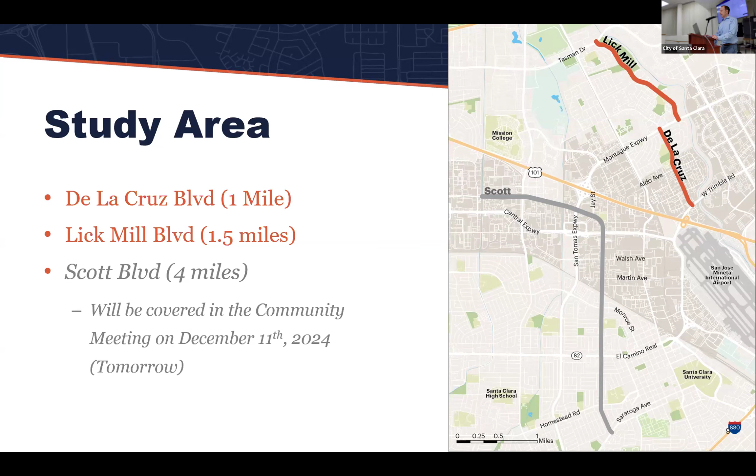The project came about originally from initial planning done by the bike plan in 2018, the city's adopted bike plan. The goal of the project is to implement the recommendations from the bike plan. For De La Cruz, that means class 2 bike lanes, striped bike lanes on the roadway north of Montague Park, from Montague to Montague Park.

Then class 4 separated bikeways, where the bike lanes are separated by some sort of vertical item, a bollard or a post, south of the park. For Lick Mill, the idea is to have a class 4 separated bikeway extending between Tasman and Montague, again from the bike plan.

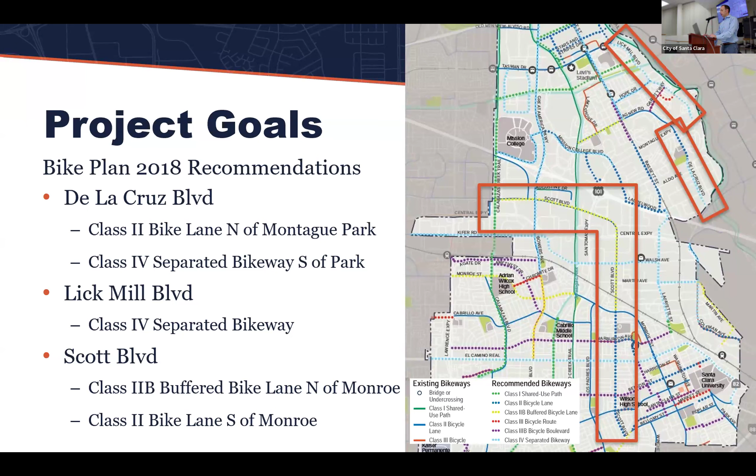For Scott, it's class 2B, meaning there's a striped buffer area between the bike lane and the travel lane north of Monroe, and then class 2 bike lanes south of Monroe to the southern terminus, which is pretty close to the city boundary.

This project has about four phases, and we're currently in the second phase. The initial effort was to collect data and develop initial alternatives. We had a community meeting last month where we presented some of those. We are evaluating the alternatives now and looking for community input to assist with that. Once we get the community input and technical analysis, it will be up to the city council to select a preferred alternative.

That process will include going to the Bicycle and Pedestrian Advisory Committee next month and to the city council in February. Once the city has selected a preferred alternative, then comes environmental clearance and final design. We want to emphasize that no alternatives have been selected or chosen at this point in time. We've identified some alternatives and are looking for community input to decide next steps and inform the council's decision.

The overall project schedule is a quick one because of the terms of the grant. We had an initial BPAC meeting back in summer, a second BPAC meeting in August, and a third BPAC meeting about a month and a half ago. Those were to review the initial alternatives and advance them. Since then, we've conducted data collection and continued developing the alternatives, and had that first round of outreach.

We've done some evaluation work, which we'll present here tonight. We're preparing to go to BPAC again next month, and then the city council the month after. The goal is that by February a preferred alternative is selected and design commences.

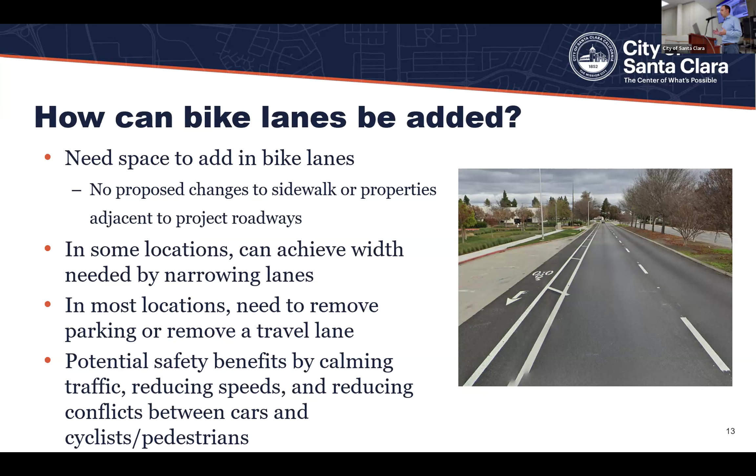Because the project budget is limited to what's in the earmark, the focus is really on striping improvements and bollard and post improvements. There won't be opportunities for a lot of concrete work to add protected intersections or modify signals, things like that. We're focused on what we can do within the available budget to add these facilities.

One of the key aspects to inform the selection of the preferred alternative is to evaluate the effect of the different concepts we've developed so far. We have several evaluation tools implemented and have information to share with you tonight to reflect that evaluation. One is collision analysis.

We've looked at where collisions have occurred in the past on these roadways, and that really informs where some of the safety challenges exist and can be addressed by this project.

Second is to look at parking, particularly in locations where parking may be removed in order to fit in the bike lanes. We've looked at where parking has been utilized, and did counts in September 2024 across several days, looking at weekdays and weekends and throughout the day, even late at night, to identify what the parking utilization is, basically the number of cars parked out there today.

That'll help inform the information we'll present tonight in terms of some of the potential impacts to parked vehicles if we reallocate the parking lanes.

And then finally, traffic analysis. We have vehicle counts that were conducted earlier this year, and particularly for alternatives where we're taking a travel lane in order to put in the bike lanes, we've looked at the effects on traffic circulation, delay, and congestion from making that shift.

It's not necessarily that all the bike lane projects will remove all the parking and all the travel lanes. We're focused on alternatives like: can we narrow lanes, can we remove parking, what are the effects of removing parking, what are the effects of removing a travel lane. We're presenting that information and looking for the community to provide feedback on those trade-offs.

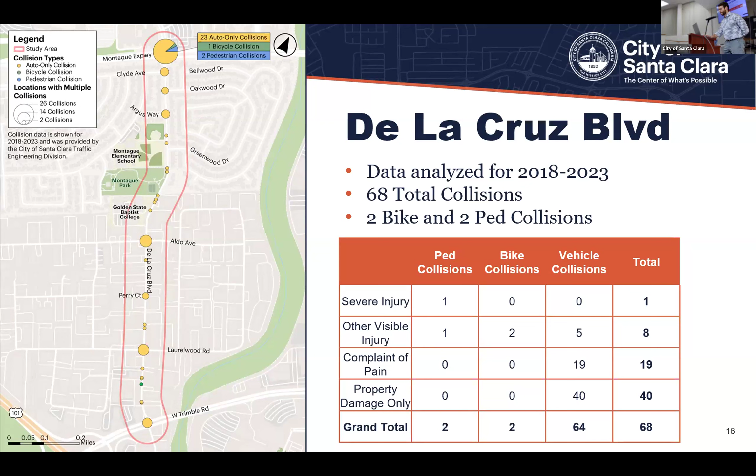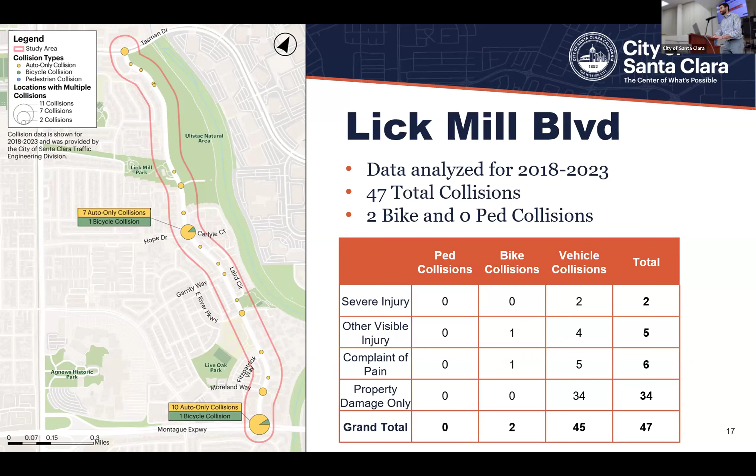We can now look at each corridor and see what the proposed alternatives are. For each corridor, we split into different segments based on what the bike plan called for, the existing travel lane configuration, whether there is on-street parking, and the land use.

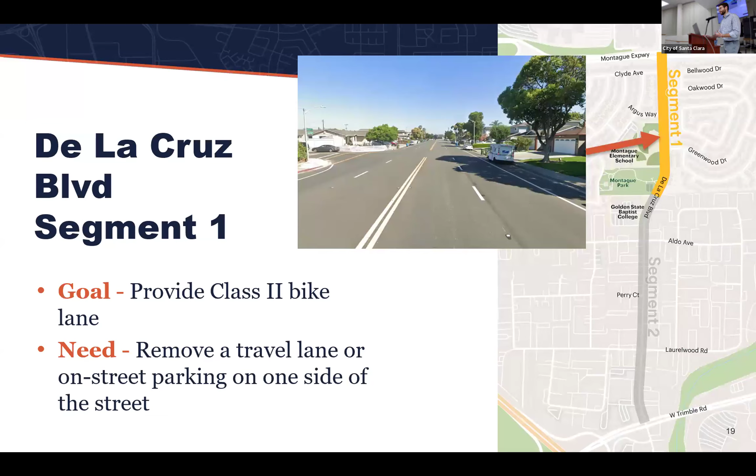For the first segment of De La Cruz, from Montague Expressway down to the south side of Montague Park, the goal for the 2018 bike plan is to provide Class 2 bike lanes. The need to create those bike facilities will come from either removal of a travel lane or on-street parking on one side of the street. For this first segment, we'll show the existing conditions as that top cross section.

So in today's condition, we see that there are 4 travel lanes, 2 going in either direction, and on-street parking on both sides of the street.

So the first proposed concept, concept A, is going to remove a travel lane. Now we have 1 travel lane going in either direction, and a center turn lane in the middle. That creates room for buffered bike lanes, buffered with a painted median.

That concept maintains parking on both sides of the street. For concept B, we're maintaining the travel lanes going in either direction, keeping those 2 going both ways. There's an option to remove parking on the southbound side of the street to make room for the painted median bike lanes.

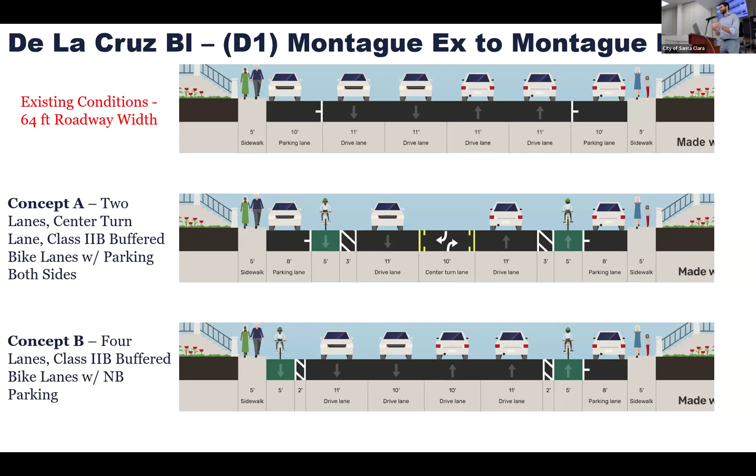One thing I want to note is that we're going to have many slides like this, walking through each proposed alternative for each segment on these corridors. It's not up to you to remember each one. One of the main vehicles for taking public input, in addition to this community meeting, is the online survey. We'll talk about that more at the end, but it will allow you to go at your own pace, look at each segment, and decide what you think should be the preferred alternative for these various areas. With that, we'll continue forward.

For the second segment of De La Cruz Boulevard, that's from the south side of Montague Park down to West Trimble Road. For this area, the goal is to provide class 4 separated bike facilities, and to do that we'll need to remove either a travel lane or on-street parking on one or both sides of the street.

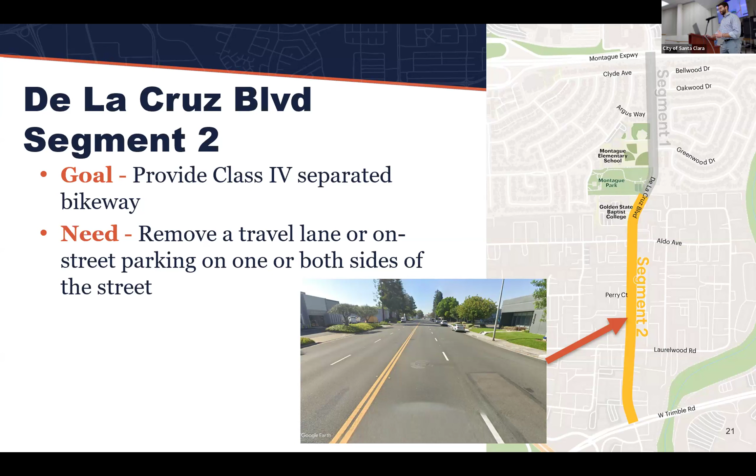The existing condition here looks very similar to what was previously shown, except it's industrial land use on either side. Concept A and concept B also look familiar. Concept A has those painted median buffered bike lanes by removing one travel lane. Concept B removes parking, but in this case on the northbound side of the street, to make room for those buffered bike lanes.

Now looking at concept C and D, this segment of De La Cruz will have 4 different options. For C and D, it creates space for separated bike lanes that have that vertical delineator, those plastic bollards that we see here.

For concept C, there's also the option to remove a travel lane. So here again we see one travel lane in either direction, with the center turn lane. In this instance with the separated bike lanes, we also have the parking floating in between the vehicular traffic and the bike lanes, so there's an option for the bike lanes to be up against the curb.

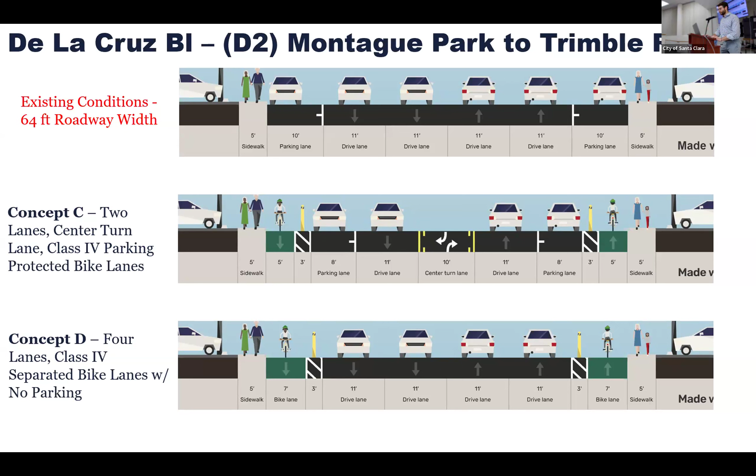For concept D, we are keeping the travel lanes in all directions, but to make space for those separated bike lanes instead of the painted median buffered bike lanes, there's a need to remove parking on both sides of the street to make room for those class 4 facilities. So those are the 4 concepts for De La Cruz, segment 2.

So we've looked at what those different concepts are; this is what the actual change is to the corridor. A lot of information here, we'll look through it left to right. In the existing condition, we have a graphic showing all those teal segments along De La Cruz, showing where on-street parking is allowed today. Those darker blue arrows represent where travel lanes can go, either northbound or southbound, and we see that's 2 in either direction for the existing conditions.

Moving one graphic over to the right, this is now looking at travel lane removal. We see that those teal segments along De La Cruz Boulevard and the side streets all remain the same, parking remains consistent. But those dark blue arrows, some have now turned light blue, and that represents the removal of a travel lane.

This also has those yellow turn lanes showing the center turn lane for these concept alternatives.

The green dashed arrows represent where we're now adding space for those bike lanes. It's lighter green for the class 2 facilities, which are the painted median buffer, and darker green where we're proposing the separated plastic bollard bike facility.

Going one more to the right, now we're looking at parking lane removal on one side of the corridor, represented with that dashed red line. The dark blue arrows match what's in existing conditions, so if we're removing parking to make space for the bike facilities, we can keep the travel lanes in both directions.

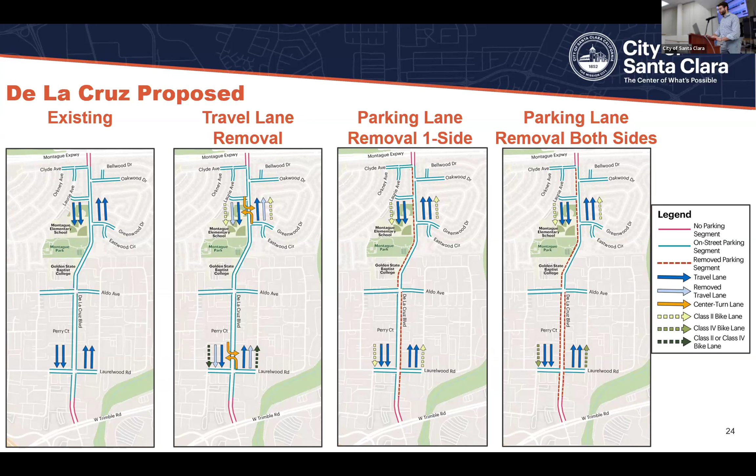I want to emphasize that on the online survey, you can take your time and look at each one of these concepts one by one. Understanding the different changes to the corridor, we can now look at the different analysis findings.

Starting with the traffic analysis, looking at a travel lane reduction, we have a graphic here showing each of the study intersections. There were 9 on De La Cruz, some signalized and some smaller side streets that are stop controlled.

In existing conditions today on De La Cruz, all intersections besides Laurelwood at De La Cruz operate within the city's level of service standard. Laurelwood today operates below that standard, but with the removal of a travel lane, there was no significant impact at that intersection. So today it operates below the level of service standard, but with the project, it won't operate much worse than it does today.

Outside of Laurelwood, the traffic analysis showed an increase of somewhere between 0 and 3 seconds of delay per intersection along the corridor, still showing pretty minimal impacts at each intersection based on the traffic analysis.

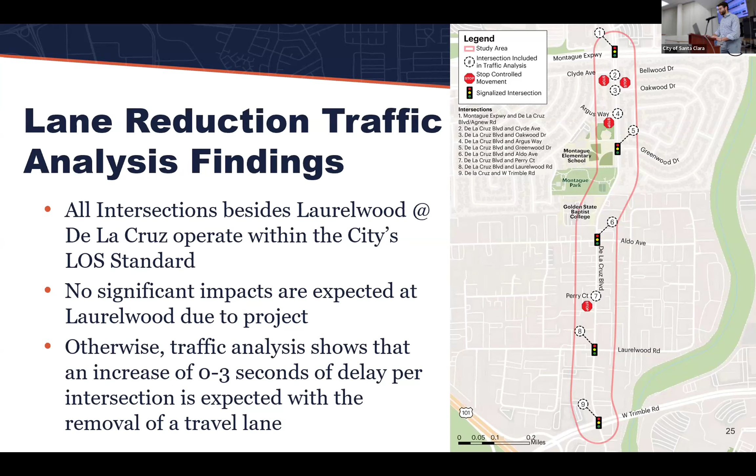In addition to the traffic analysis, we also looked at parking. Looking at the existing, no parking removal situation today on De La Cruz, we have a graphic on the left showing the utilization of how used each parking segment is along the street. The darker the blue, the more utilized that segment is.

This graphic is specifically looking at the daytime period on a weekday. We saw that the peak occupancy hour for the weekday daytime period was from 10 a.m. to 11 a.m., which is kind of the limiting factor shown in the graphic.

We also have a table showing the parking inventory, how many spaces are available on the northern segment, the southern segment, and the side streets, along with the utilization we saw during the weekday daytime period and also during the weekday nighttime period.

For the nighttime period on the southern segment, that's showing 0% because when we did the parking counts, we did not see any cars parked there, most likely because this is an industrial area at nighttime, and there's not going to be as much nighttime parking as in the residential area to the north.

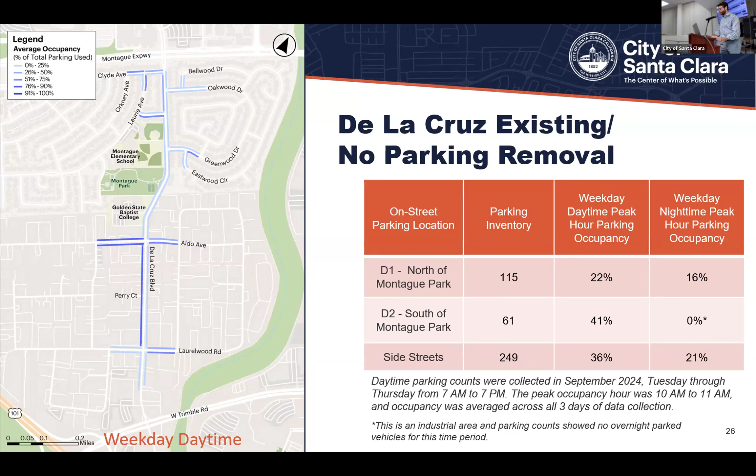So this is the existing condition, the existing utilization we're seeing today. We also did an analysis to understand what parking may look like if we remove on-street parking on De La Cruz from one side of the street.

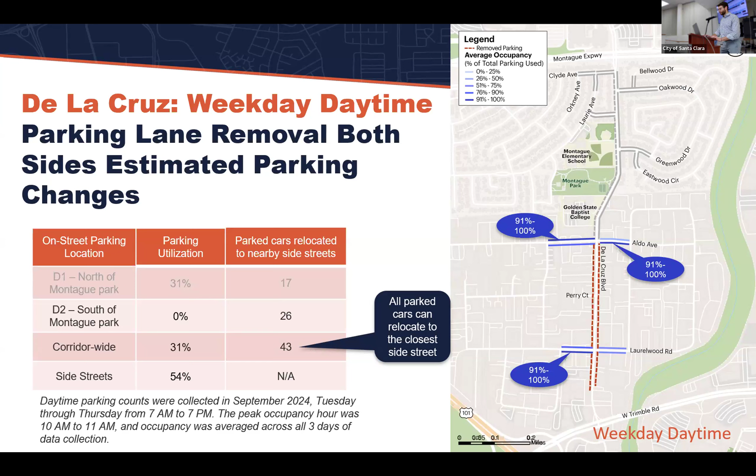What we saw in the previous slide was that 5 cars were needing to be relocated with the removal of one side of the street. Removing parking on both sides of De La Cruz here, we expect to have to relocate 26 cars. So now instead of 22 corridor wide, that's 43. But again, what we're seeing is that the side street capacity on the nearest side streets are able to have space for the cars that were parked today on De La Cruz Boulevard in that southern segment.

And with that, we are through De La Cruz. We're now going to talk about Lick Mill Boulevard, starting with the proposed alternatives again. For Lick Mill, we also have two different segments. The first segment is from Tasman Drive down to the south side of Laird Circle, and the second segment is from Laird Circle down to Montague Expressway. One of the main delineators between these two segments is that the first segment has on-street parking today on both sides of the street, whereas the south side of Lick Mill has parking only on the southbound side.

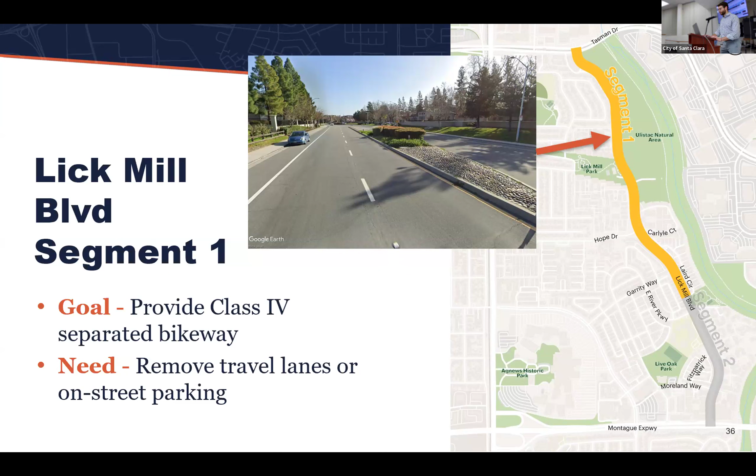The goal for this first segment is to provide Class 4 separated bikeways. To do that, there's going to be a need to remove either travel lanes or on-street parking, so there are three concepts for Lick Mill Boulevard in this first segment. The existing condition has 2 travel lanes in either direction, so 2 northbound, 2 southbound, and then parking on both sides of the street. You'll also notice that very large center median.

For the first concept, there's going to be the option to remove one of the travel lanes to make room for these painted median buffered bike lanes. In concept A, there's now going to be 1 travel lane in either direction, but on-street parking is maintained on both sides of the street.

Concept B is going to have that Class 4 parking, that separated parking with plastic bollards, also with the removal of a travel lane. So concept B also has 1 travel lane moving in either direction, and the parking here is going to be floating, separating the vehicular traffic from the bike lanes. So concept B is going to have those bike lanes up against the curb line.

Concept C is going to maintain all the travel lanes as they are in the existing condition today. But to do that and still have the separated bike lanes with those plastic bollards, there's going to be the need to remove parking on both sides of the street.

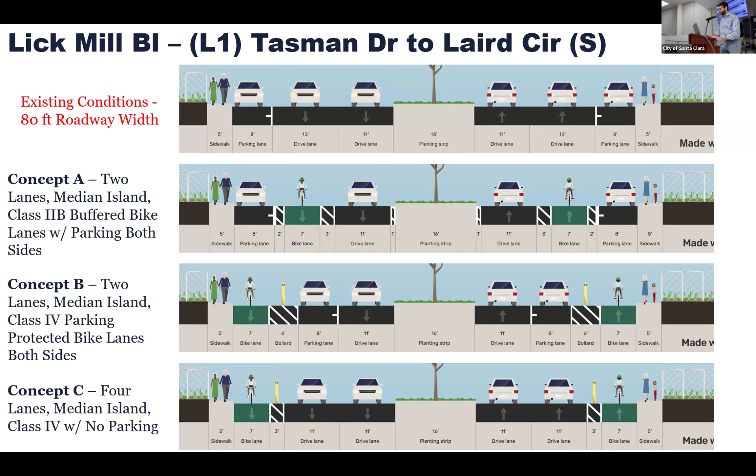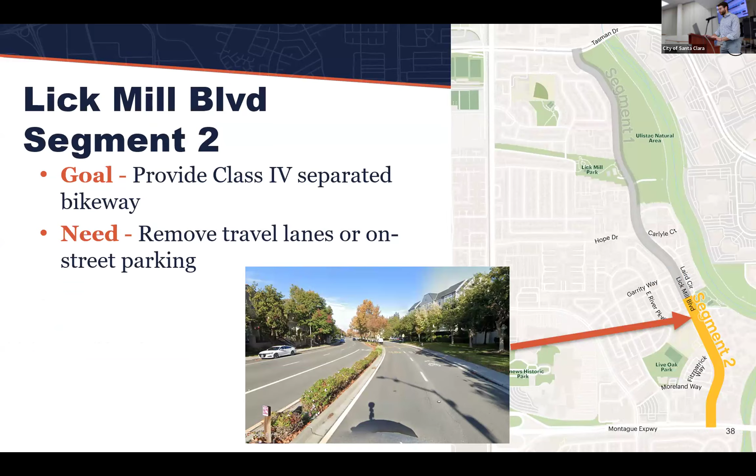Lick Mill Boulevard Segment 2, based on the 2018 bike plan, also has the goal to provide Class 4 separated bikeways. To do that, there's a need to remove travel lanes or on-street parking. This looks similar to the first segment of Lick Mill, except that in the existing condition, we don't have on-street parking on the northbound side. Because of that, the options to make space for bike lanes going northbound are pretty limited. So for concepts A, B, and C, the only option is to remove a travel lane in the northbound direction to make space for that separated, plastic bollard protected bike lane.

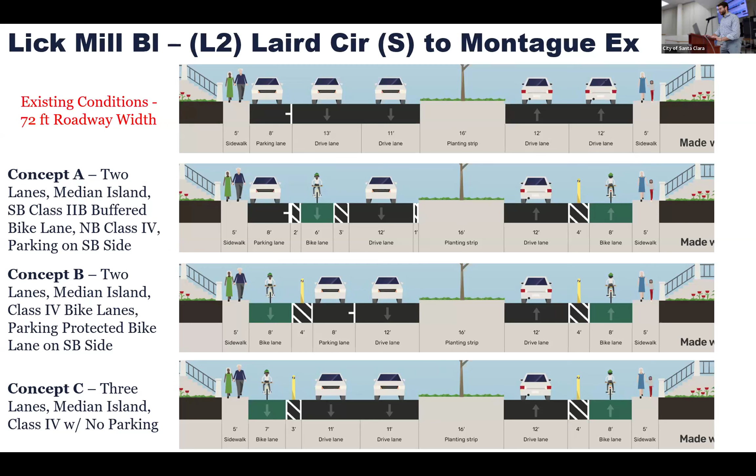Going southbound, concepts A, B, and C match what we saw in segment 1, so I'll walk through that quickly again. Concept A has the option to remove a travel lane to have buffered bike lanes. Concept B also has the option to remove a travel lane to make space for a separated bike lane, where parking separates the travel lane from the bike facility. Concept C keeps both southbound lanes as they are in the existing condition to make space for that separated bike lane with the plastic bollard.

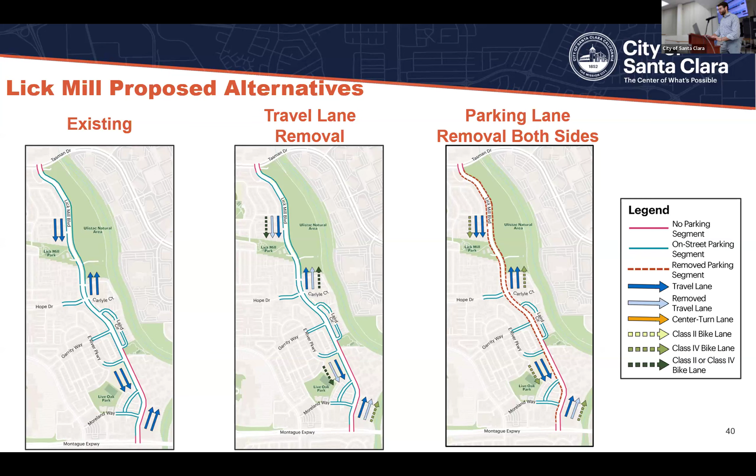There's only one option here for parking removal on Lick Mill, and that is to remove parking on both sides of the street. In that condition, the travel lanes are kept the same on the first segment and on the southbound portion of the second segment. And again, since there is no parking to remove on the northbound side of that second segment, there's a need to remove a travel lane to make space for bike lanes.

We're going to walk through the traffic and parking analysis again. For the traffic analysis on Lick Mill, looking at the reduction of a travel lane, we have a similar graphic showing the different intersections we studied. On Lick Mill, we looked at 16 different intersections. In today's existing condition, all but 3 of the intersections operate within the city's standard for level of service. The 3 that are operating below are Tasman Drive, East River Parkway, and Fitzpatrick Way, and the only one of those that is a signalized intersection is Tasman Drive on the north side of the corridor.

The traffic analysis showed somewhere between 0 and 14 seconds of increased delay per intersection with the removal of a travel lane. The two areas that might experience heavier delay, specifically in the AM peak hour periods, are those turning left off of Mansion Park Drive or those turning left off of East River Parkway. Even though there's a reduction of a travel lane, and people turning left off these side streets no longer have to cross two lanes to get to the other side of the road, there will be similar levels of traffic moving through a single lane, which makes it harder to find a gap in traffic. So in those two specific areas, only for AM peak hour periods, there's an expectation that there may be an increase in delay.

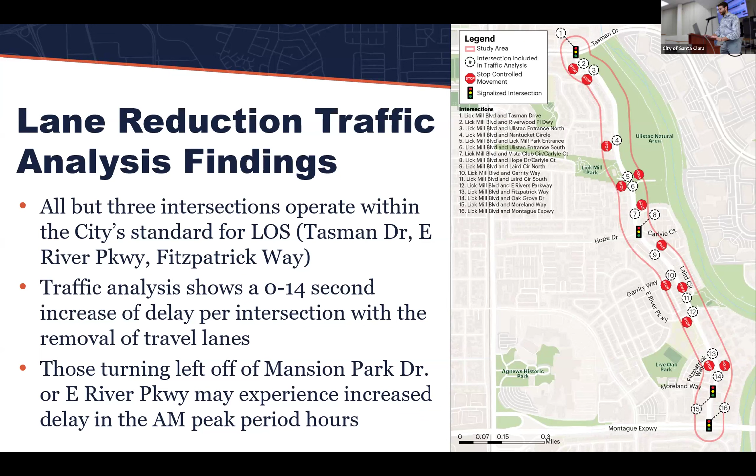Now going to the parking analysis, looking at the existing conditions for Lick Mill, we have a similar graphic showing parking utilization. Again, the darker blue represents where there is more parking or a higher utilization of parking. We also have a table showing the parking inventory, the number of spaces in the northern segment or southern segment, and what we're seeing as the utilization for the weekday daytime and weekday nighttime periods.

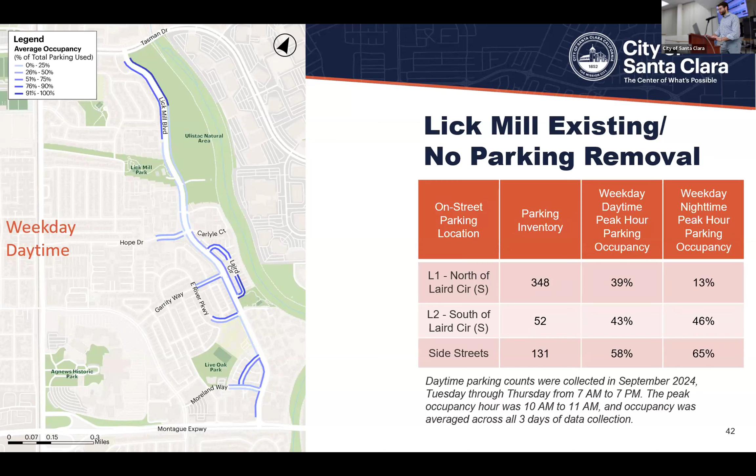The methodology here is to relocate any cars affected by the removal of parking on Lick Mill Boulevard to the nearest side street, ideally within 500 feet of where they're currently parking today. In the northern segment, we expect about 16 cars able to relocate to a nearby side street. In the southern segment, we expect 22. Corridor-wide, that's about 38 cars we expect to be able to relocate to nearby side streets.

We also expect at least one car to have to find parking across from where they're currently parked. We expect about 121 cars affected by this without somewhere on a nearby side street to park, at least within 500 feet of where they're currently parked today. So that's many of the cars currently parking on Lick Mill Boulevard who do not have a nearby location to relocate to.

Something to note is that this is showing the weekday daytime period. What we see in the daytime period on Lick Mill Boulevard is that the northern segment closer to Tasman Drive has really high utilization that we expect is for temporary construction parking. Factoring that in, we believe that's going to be about 100 cars hopefully not impacted by this parking removal.

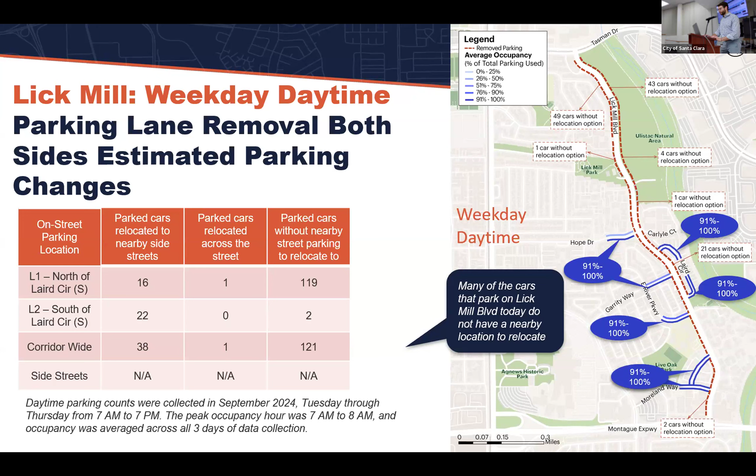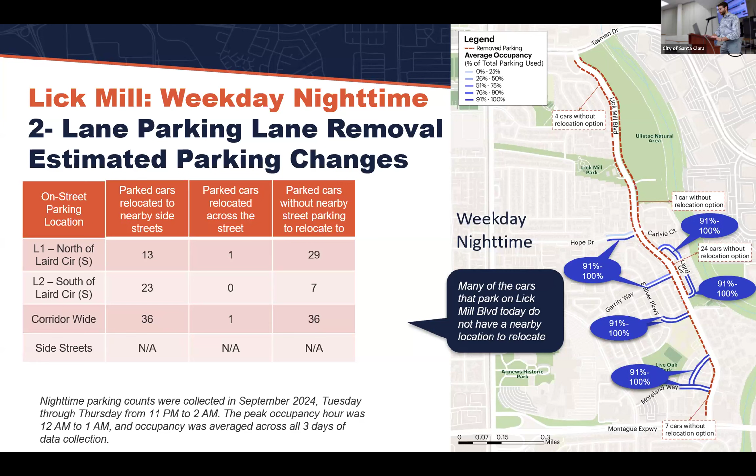Again, we have those blue bubbles on the right side showing where the different parking segments are at peak capacity and where we expect those to be fully parked, fully full. And that is the parking analysis for Lick Mill.

So I think Adam's going to come up and talk about next steps. Thanks, Zach.

In terms of next steps, we are looking for your input. We have a survey that's open now; Regina will talk about that in just a second. We'll be taking all this analysis and the input we hear from the community to the BPAC, scheduled for January 27th, next month, so put that on your calendars. Then city council February 25th, the month after, we're marking as tentative, but assuming we're able to gather all the input and get direction from BPAC, the goal is to go to city council in February.